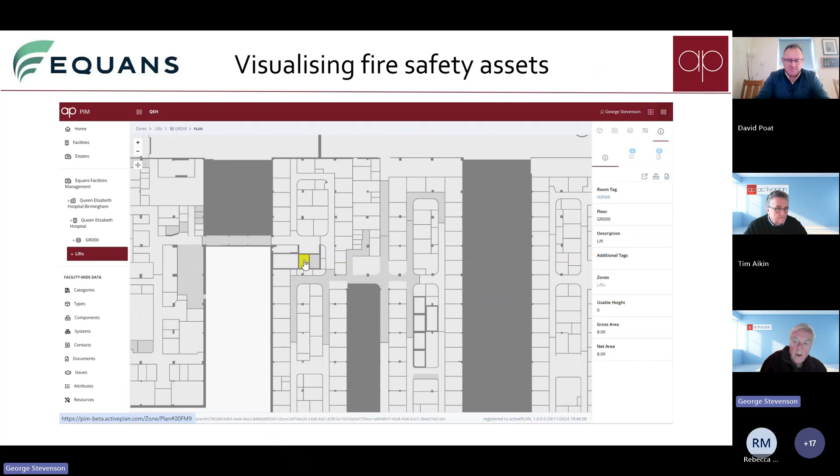All of the fire walls, the different fire compartments, are actually being defined in the spatial model, so you know what that space is being used for and who's responsible for it. Importantly, in hospitals they're often changing the use of spaces, and that can have a big impact on the fire strategy and something that's changed. What they've been explaining to us is that by doing a follow-up fire strategy, you can identify some assets that are no longer in compartment walls, and therefore they no longer need the same level of maintenance and inspections - that can save a lot of money.

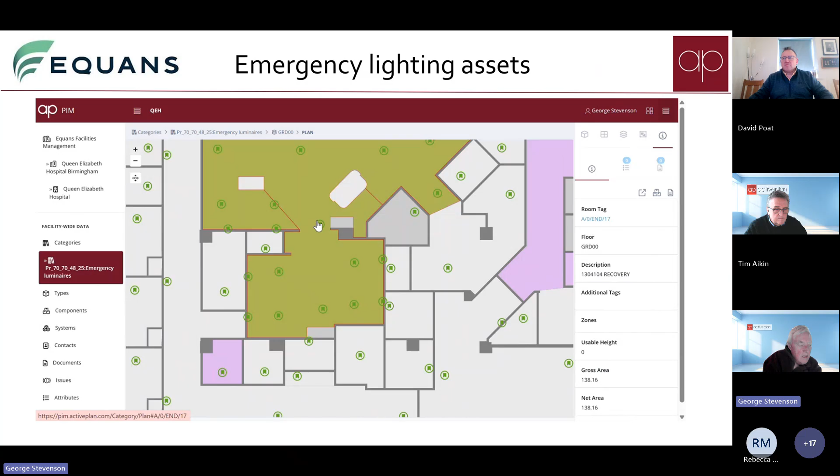So in this case, this is just illustrating where all the luminaires are, all the fire, the emergency lighting is, and what circuit it's on, and things like that. So these are the sorts of things we're trying to get to with housing.

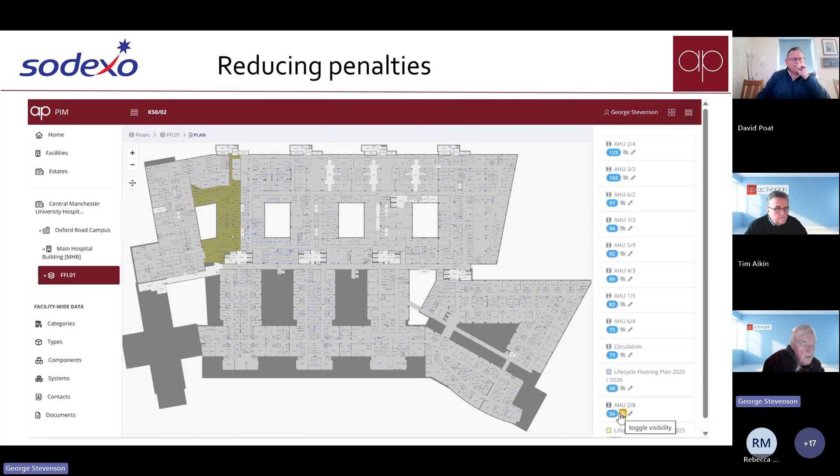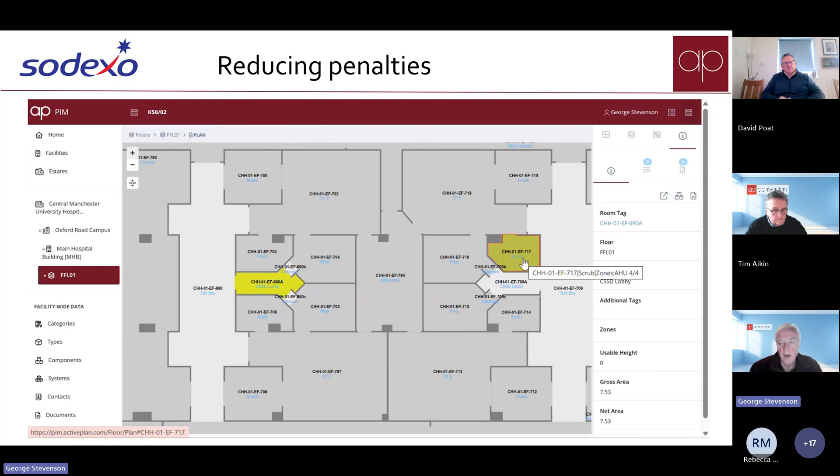So if I just power through this - here we've got, in this case, ventilation, showing which air handling units are delivering to which spaces. And from that perspective, looking at these operating theatres - if they become out of commission, or if they're not getting the right ventilation, they can't be used, so there's large penalties being addressed against them. This is a combination not just of fire, but also operational use and what's working.

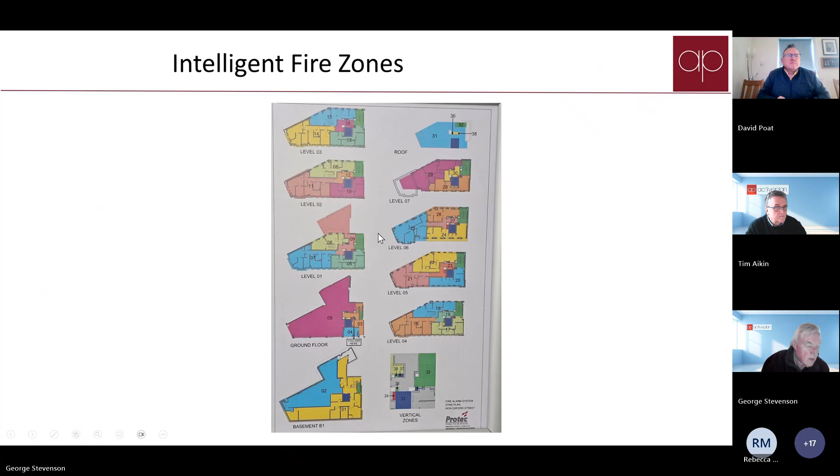So this is a residential block where what we're doing here is relating the fire zones to the information model itself. We've got a spatial model that's come from the O&Ms, created from the O&Ms, and each of those spaces are intelligent spaces, but they're then grouped together into spaces that are performing a function - these are the compartments, these are what's being addressed by the fire alarm system.

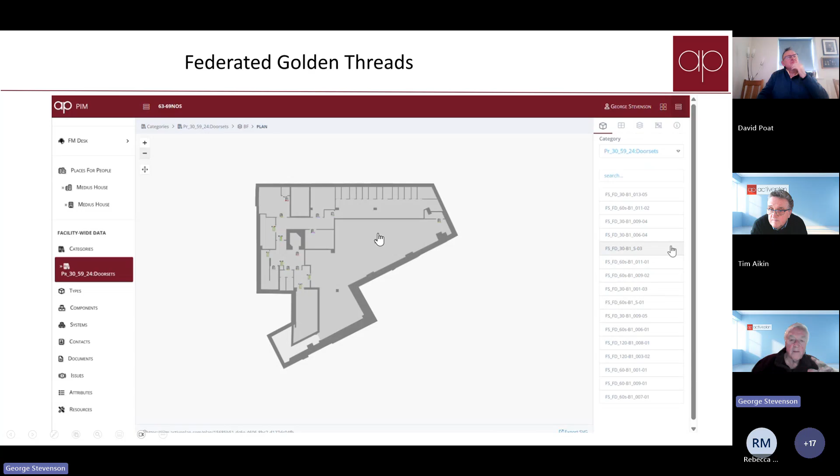And we can then bring in things like drawings and reflected ceiling plans and things like that, so rather than it being information in different files that you're having to cross-relate, it's a lot easier to bring together. So this is a fire strategy example where this space here - it's not just a space, but we know not just the number, we can very easily see it's a mist system plant room, so it's a plant room, and that's why it's got a 120-minute door on it.

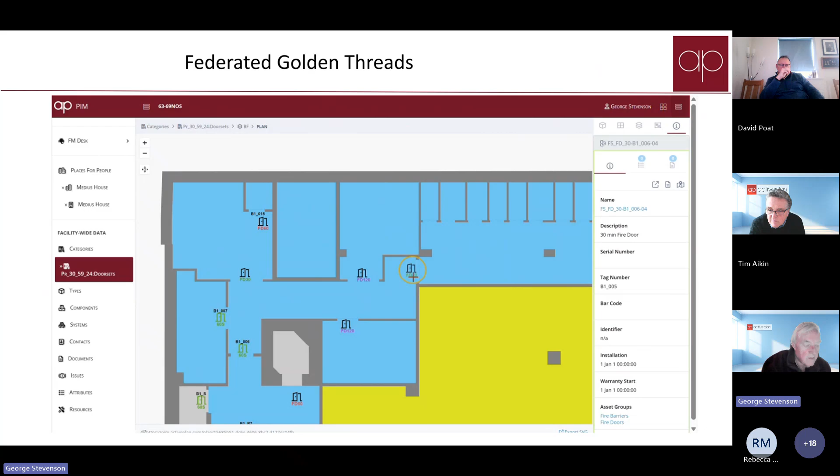We've got a 120-minute door here as well, and that's because that's a battery store. So the relationship between the space and the fire protection assets in there is important. But what we're also able to do is see where the fire compartment drawings are, so you've got the cross relationship between the asset, the space, and the measures of protection that have been put in place.

And then these assets themselves have been read from the schedule, the floor plans, and also the installer schedules, so we've got a record here. Again, this has normally been provided as a separate document, but by gluing it together, it means you've got the record of what was done when it was installed. So when somebody, maybe in 3 years' time, 5 years' time, is doing an inspection, they can be inspecting against the same parameters.

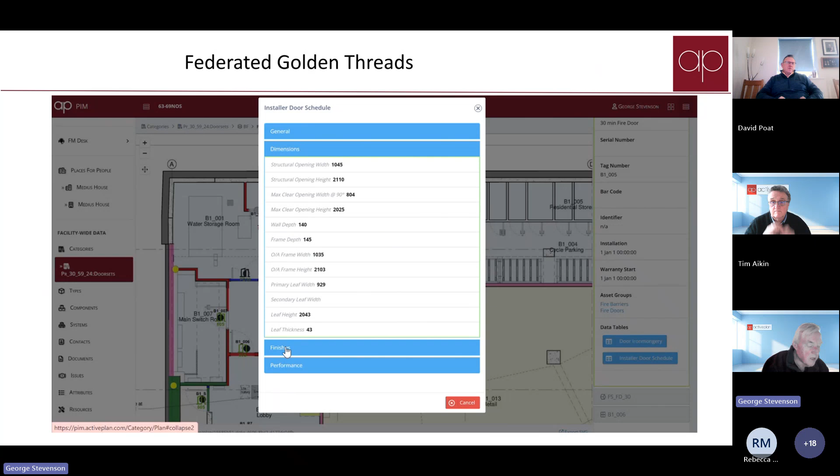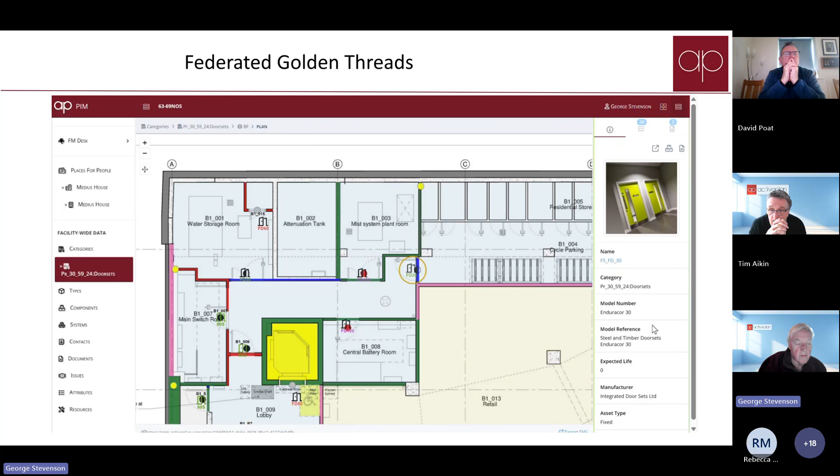You can then identify whether something has changed. Something that people might consider trivial, like the ironmongery for example, clearly isn't, because that can be the thing that can really trip you up. So the challenge is being able to tie together this complex information, which is normally represented in different documents, and then being able to relate that back in a more meaningful way.

Tom, you've got a question? Oh, sorry, go on. No, go, Tom.

Hi all, yeah, just a quick one. So Tom from Symmetry here. I've just got a question on a point that Rebecca raised before.

Rebecca, you mentioned that from Riverside's perspective, you focus on just the fire doors. How does that tend to work across your team? You mentioned that you have individuals working in different areas, how do you bring that together and make sure you're working in the same environment and direction?

Yeah, that's a tricky one. I guess one of the things I wanted to come on here was also to have a look at the system that they're using as well, because I think one of the difficult parts of Riverside I find is probably the systems that they're using don't support that. So we haven't got a good enough cross function to be able to see what we're working on, what other people are working on.

I guess the only positive, if you can find a positive in it, is probably the gateway, because we have a team that helps with our gateway applications. So if we go to our gateway, it usually gets picked up then - oh well, hang on, someone else is doing something here - so we can add it to one gateway application.

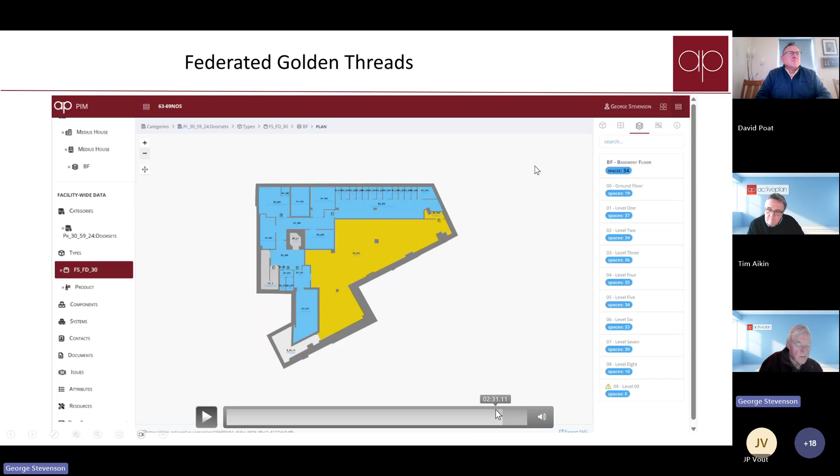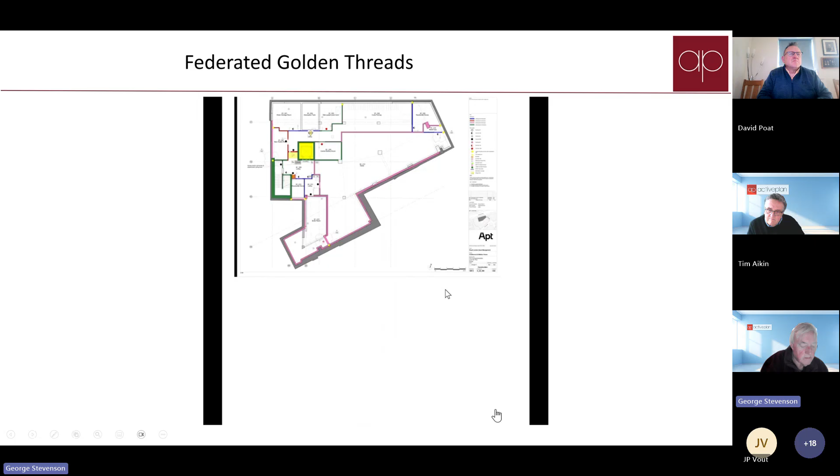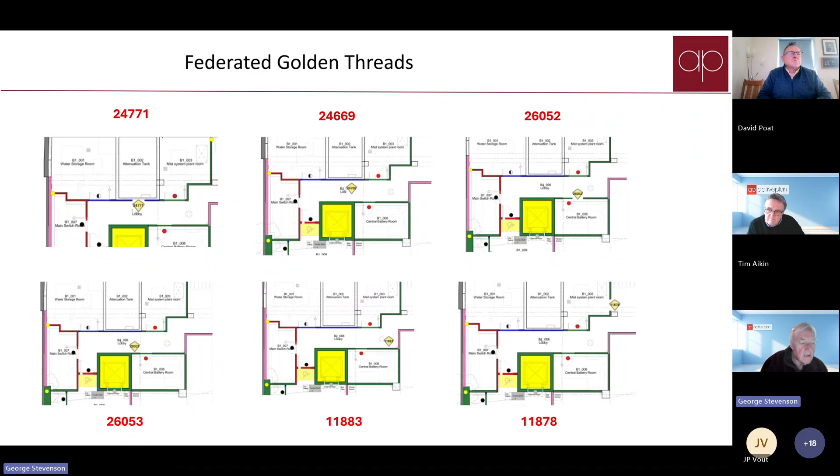It's also about purpose. What I'm showing you here is really being able to glue things together so we can demonstrate Regulation 38 compliance, and also tie it back to documents in the other information set. For example, this fire stopping information came in a fairly traditional PDF form. What we've done is identified where each of those fire stopping assets are, and translated the locations from those individual PDF plans, bringing them back in using COBie to a spatial model.

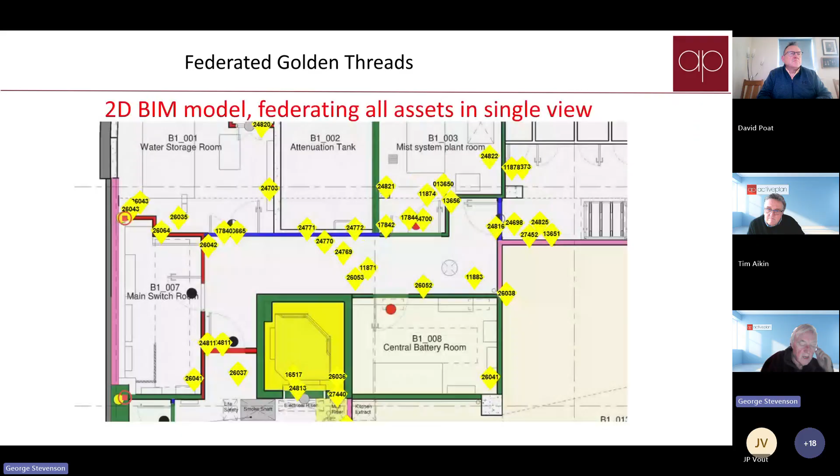So we've got the coordinates, and you can see them in a joined up way. In this case, we've got the fire stopping in the same view as the fire doors, and the drawings indicating where the compartments are. Ideally this would have come as part of a proper BIM delivery, but in practice it doesn't happen because that installation information is likely done by a specialist subcontractor - why would they put it back in a BIM model? It just doesn't work that way.

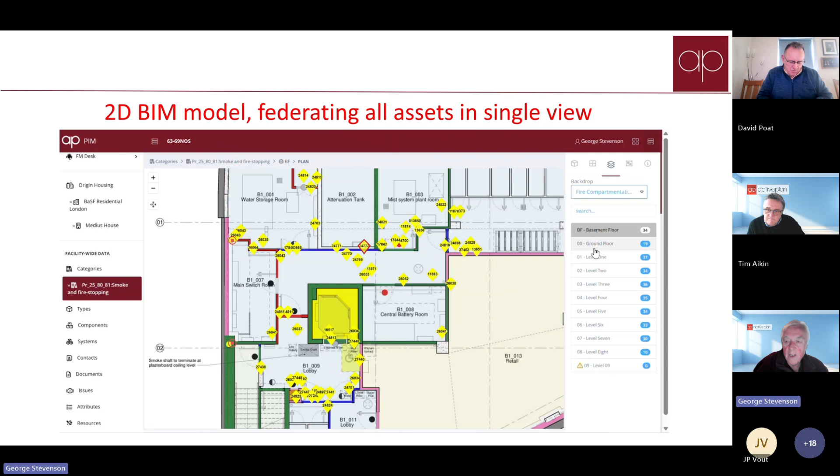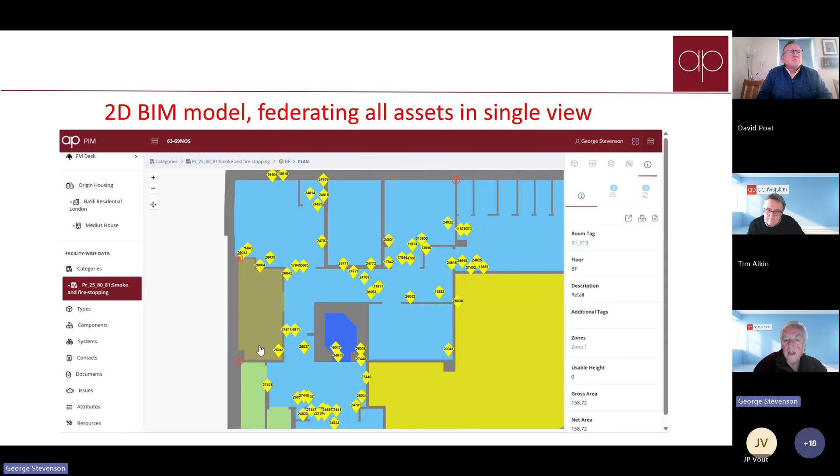So the principle we're working on is that clients like David, you're paying for this work to be done, you're paying for the information to be collected. If we can use more standardization and methods to glue it together, then it can be used for lots of different purposes.

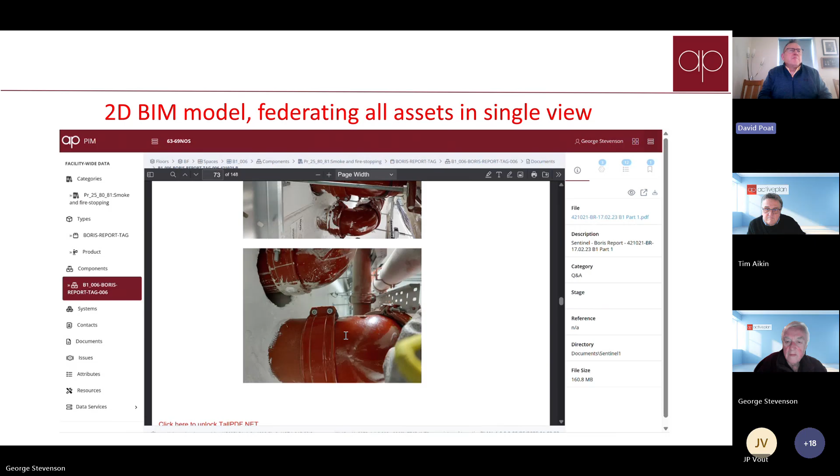I'm from Sovereign Network Group, an affordable housing provider, and I'm a building information manager. I've just come into this role from an architectural background, so I'm still wearing two hats at the moment. Just to build on some of the things you were saying - and this is going to be heresy to George, but I'll say it anyway.

But there still isn't a real burning platform to get the data and information to the level of detail that George is sharing. And I'm not suggesting that's wrong. What I'm trying to say is as clients, you tend to be fairly cautious with what you're investing in. There's a value for money conversation to be had - in terms of investing in systems and data that gives you that level of information, what's the return on that investment?

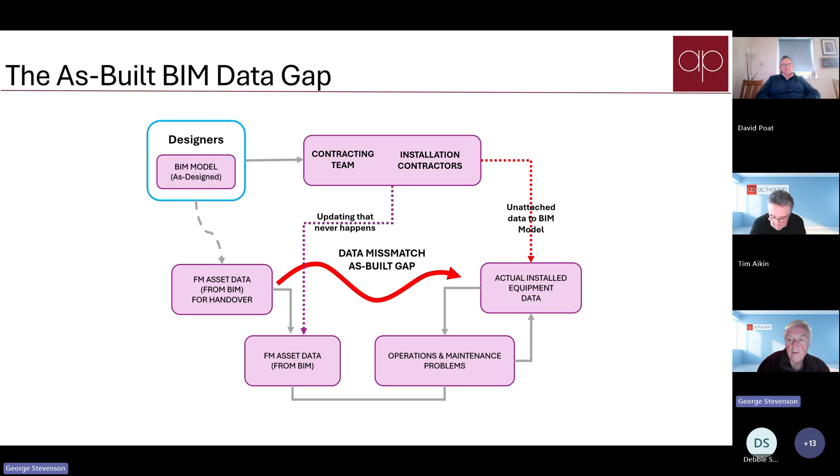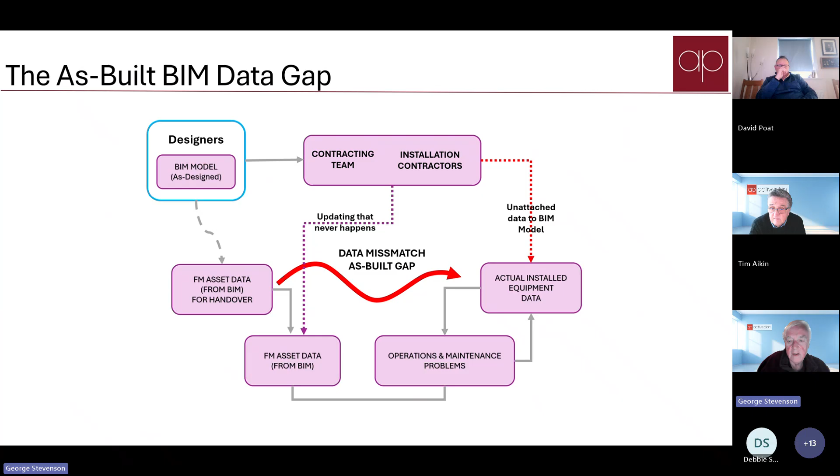Okay, so this is what we've been doing: looking at addressing how currently, even if there's a BIM model, often it's the design model that comes through to the FM team rather than a proper as-built BIM model, for the reasons you've raised. We're not seeing the detailed information going into the BIM model, and in practice that's not fundamentally a problem as long as the data's good, because we can also use 360 photography to capture a lot of what actually gets installed.

One of the things we've developed, which we'd like to encourage people to get on board and test with us, is the ability to take a substantial O&M manual. In this particular case, we were given 10,000 documents that were not particularly well organized, but we got them as a zip file.

This tool that we've created allows us to strip them back to 6,000 files, which is still a lot, but it also goes through and identifies quickly which ones don't really exist. So you can see you've got 35 there that have zero size. Tim can explain this much better than me, but what it's actually doing is a very quick check as to whether the information being handed over is coherent.

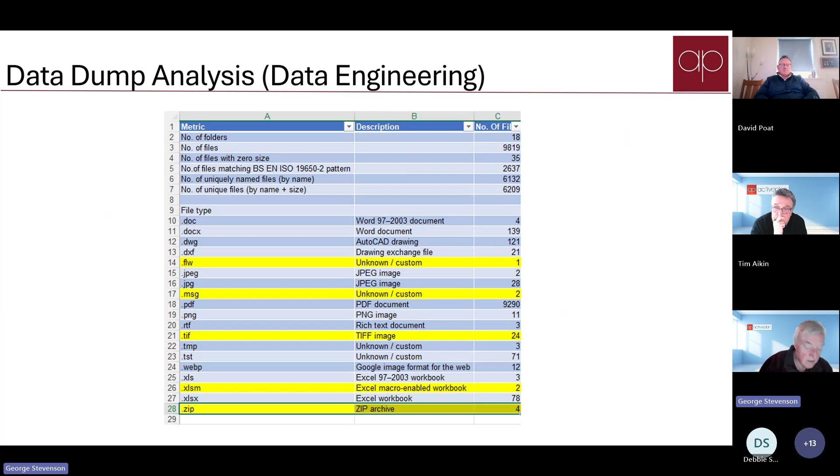What we've also done is worked with the client to come up with a standard methodology of auditing the O&Ms, to go through in a methodical way to see if the O&M information actually provides what you need. And what we're actually doing here is snagging the O&Ms.

Now what that does is give people a little bit more time when they're under pressure to sign something off. They can go back and say, well, there's some errors here, there's incomplete stuff. In this particular case there were 54 work packages, each with their own O&M information that was all compiled, but what we've got here is the identification of what the gaps are.

And what we've then done is started to create AI tools so that manual checking process, that manual auditing we were showing at the beginning, has now been translated into some reusable prompts. And the manual report that was created can now be automated.

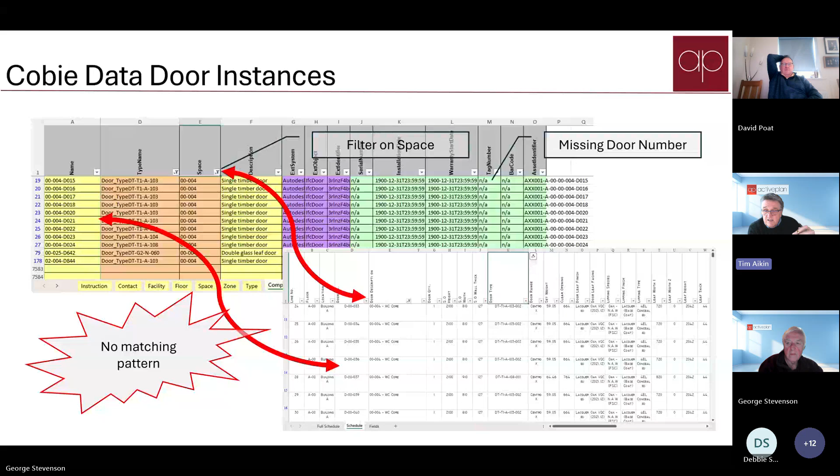And then on door types, there were 30 door types in the federated BIM model, but actually 100 in the installer's schedule. Again, the schedules were baked into the O&M, so they had to be unbaked - you have to extract it. That's getting a lot easier now to do using AI tools; you can do these things rapidly. So that's an example there.

And then we can turn it back into a readable data set, but on a project you're not going to get one door schedule - you're going to get multiple door schedules: steel doors, timber doors, aluminium doors, doors to the roof plant areas, doors in the external fenestration.

Now, fortunately, the architects had produced drawings which had the door numbers on them, and this was obviously, as it was BIM level 2. But again, they'd made a mistake because they'd copied the doors from one level to another and then manually changed them. There are tools inside these modeling systems that allow you to automatically update these things.

So we ended up with door nomenclature. The door nomenclature in this case was D hyphen and then a level number. You can see on the first floor, top left, that the door from the office into the corridor to the lift lobby is actually level 2, and it appears on the 5th floor and also the 4th floor as well.

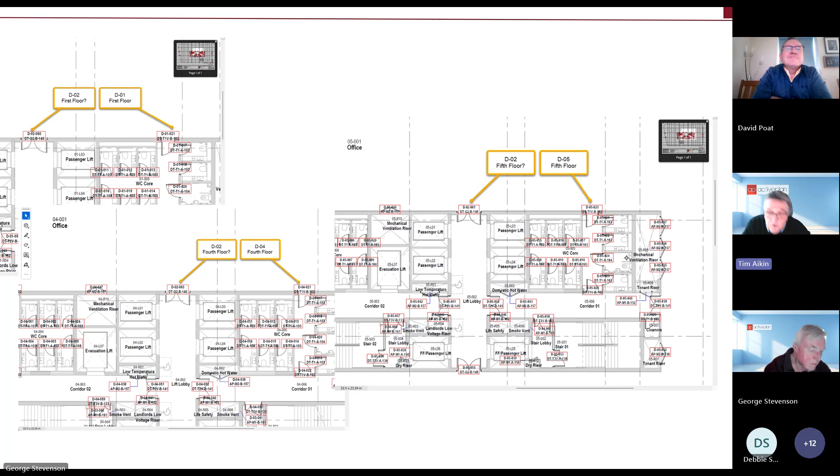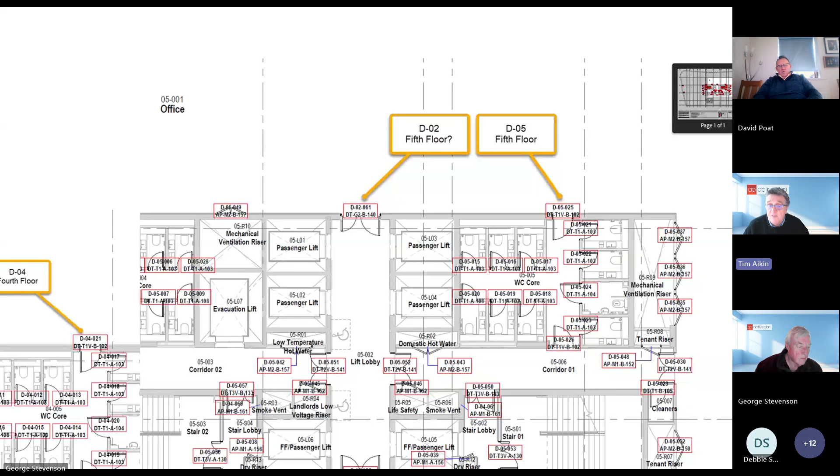So simple mistakes made that can really cause a problem, because if you use this, you can't tie it back to the door schedule. The door number is the key that holds all the data together. So these are simple things that need to be checked and tested at the construction end. The construction team needs to make sure they're checking these things.

I think a lot of this is all about checking that your data is actually valid. And if nobody's doing it, then it will slip in. So that was the point I was making earlier, that the information is being produced, you're paying for it to be produced. But because it's not being validated and checked adequately, then people won't invest the time.

Just a quick question. You in developing this - and as you know, George, we do an awful lot of work with Zutec / Createmaster - are they part of this conversation, or are they quite separate? No, we're actually using some of the Zutec information. I'm not sure that they are as engaged as they could be. They come along to the meetings, but they've not yet contributed on that.

When it was Createmaster, we used to have quite an active connection with them. Sure. But...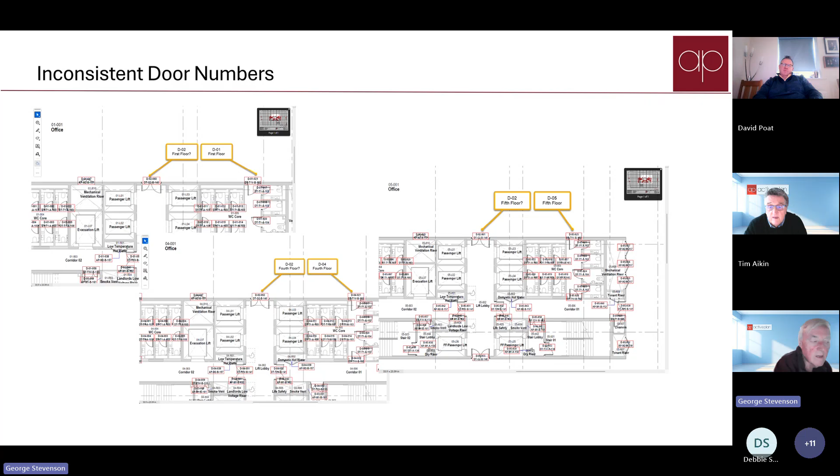And it goes through very quickly, gives you an answer - no. But then it goes through into detail to say what we have got and what's missing.

So we've got a meeting set up, or we're in the process of setting up a meeting with Zutec, who are talking to us about their AI capability, functionality. So what I don't know is whether that is all about the quality of the contents of the information, or whether that's just a kind of searchability for documentation.

We've not spoken to them yet, but this is really interesting because from our point of view, we typically use Zutec and Createmaster to assemble our O&M documentation. We're then reliant upon - we appoint a team of quality management consultants throughout the construction period, ranging from lift consultants, M&E consultants, heating consultants, fire consultants, all doing quality assurance work for us through site inspection. But then at the end of it, we ask them to go through the O&M documentation to check its accuracy and its content.